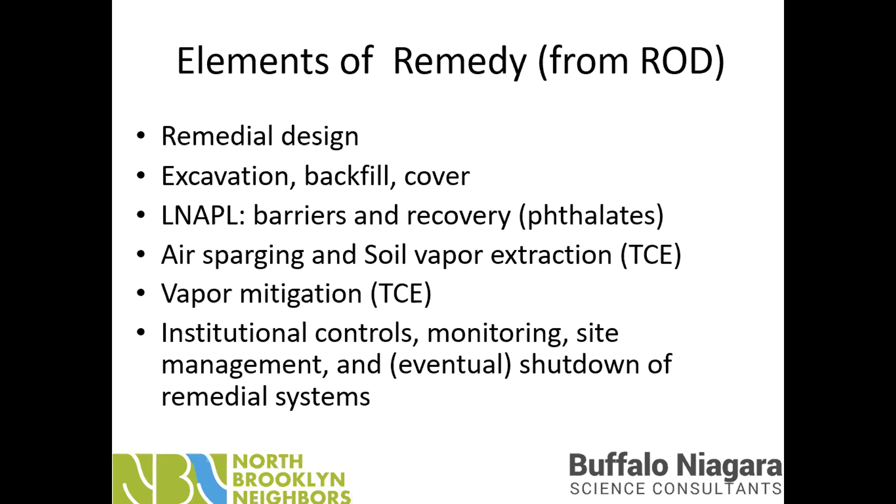And so I'll just end there, and we are willing to respond, like everybody else, to the questions and answers in terms of our roles and responsibilities in the TAG grant. And I'll stop sharing.

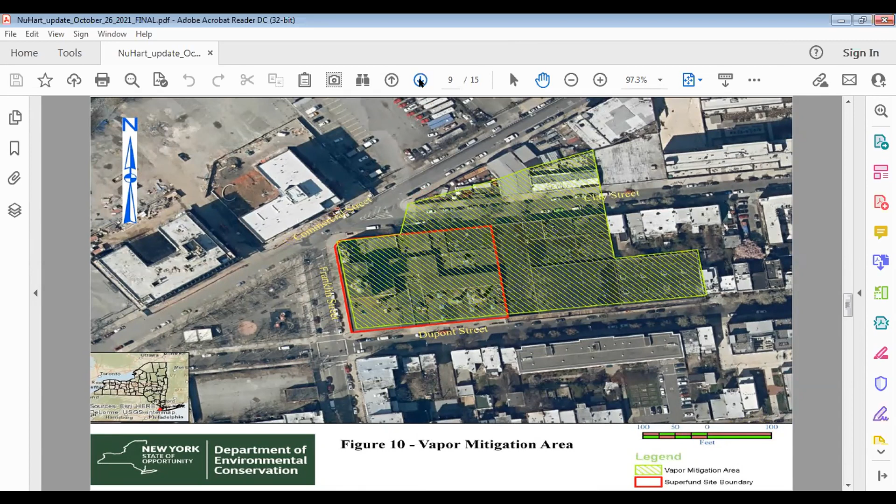And then this is a figure showing the area that is proposed for vapor mitigation. This was discussed during the ROD public meeting.

So with the current status of the Superfund portion of the site, again, there is an interim remedial measure, IRM, consisting of two phthalate recovery wells that are continuing to operate on the Superfund portion of the site. That is continuing, and we get monthly reports on that, on how much product is being recovered, et cetera.

They are also continuing to monitor all of the off-site wells to confirm that the phthalates are no longer migrating any further off-site. In addition, as I mentioned, the Superfund portion of the site was an active generator of hazardous waste. That means they fall under a federal program called the Resource Conservation and Recovery Act.

And the RCRA program essentially requires that any hazardous waste generation or storage areas have to be properly closed before the building can be demolished. They're going to have to do investigation of the building itself, inside the building. So right now we have this RCRA closure plan that was submitted by the prospective purchaser in September.

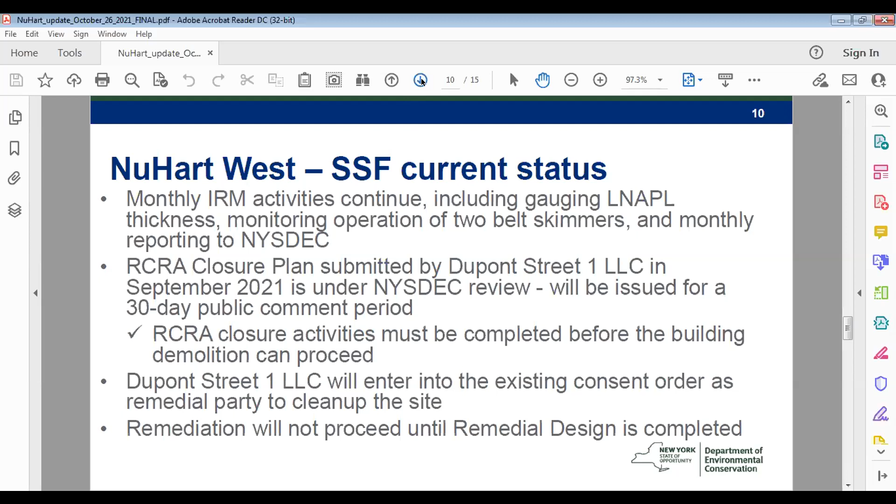And finally, the remediation on the Superfund site will not proceed until the remedial design is completed and vetted by DEC, DOH, and your TAG consultants.

So moving on to NuHart East, that's the portion of the site that the prospective purchaser is looking to bring through the brownfield cleanup program. They have submitted an application which included a supplemental investigation work plan and an interim remedial measures work plan. That application, those work plans were submitted in August 2021.

The purpose of the supplemental investigation work plan is to collect additional data to develop the remedial action work plan that's required for the eastern portion of the site. The IRM work plan proposes to remove 5 petroleum underground storage tanks, USTs, and the associated petroleum impacted soil. That's in the northeast corner of the BCP site.

In addition, these IRM excavations will allow installation of a minimal foundation element, which is required to allow the site to qualify for affordable housing credits.

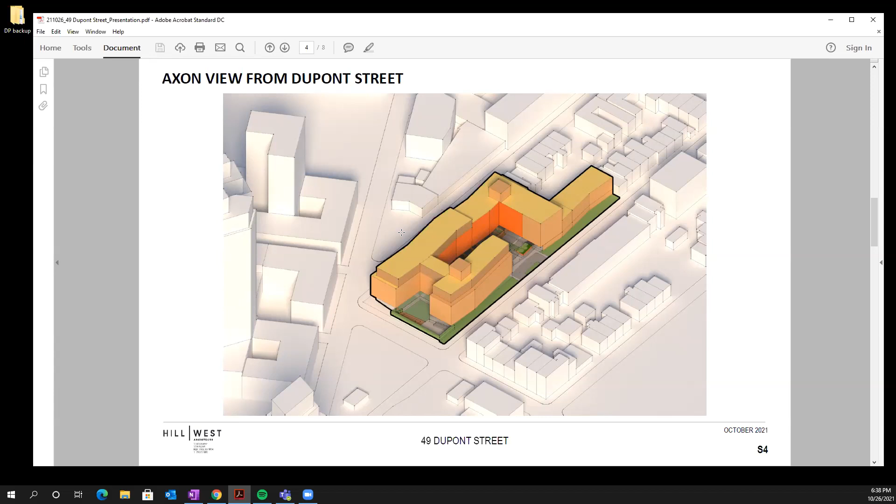But also we've retained the environmental consultant, James Bello at Haley Aldrich, for continuity. He's been with the site for a long period of time and has been extremely helpful in helping us wrap our hands around the existing conditions, the cleanup that's required, and ongoing dialogue with the various agencies, whether it be OER, DEC, and local electeds.

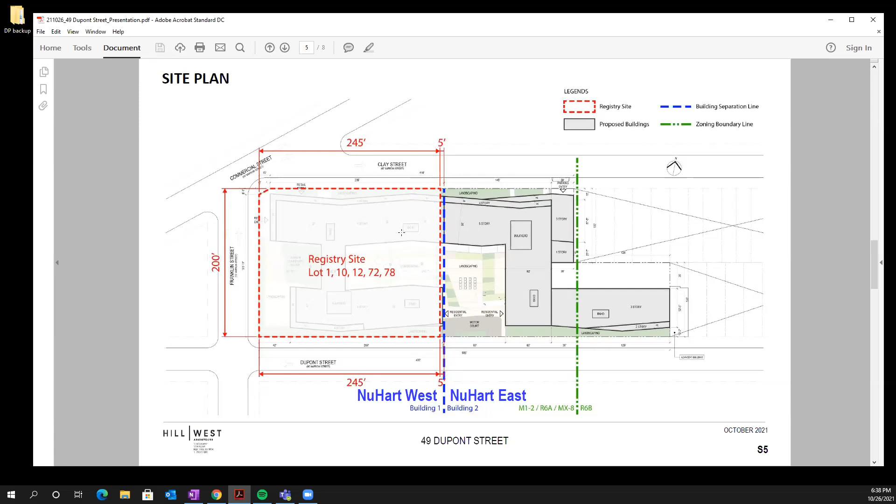Quick overview of remediation and development timeline.

As Jane mentioned, we did some geotech borings earlier this summer. Today, abatement is ongoing, started by the prior owner, and this is subject to the jurisdiction of DEP and DOL. We mobilized about a week and a half ago, but this week it's been slowed down due to rain.

We also understand that community members have seen people in and out of the building. The owner of the abatement company manages inflow and outflow of the building to make sure we don't have people walking off the street, because once those gates come up, there's a lot of interest from people to see what's inside.

We're also working in parallel right now against a tight deadline to further develop, with our design team, drawings, construction documents, and DOB approvals in parallel, for demolition, foundation, and ultimately the new building.

We've had conversations with the various agencies, DEC and OER, regarding the cleanup, brownfield, the remedial design, and what's required to ultimately allow us to redevelop the site and clean it up. Right now we're in the middle of the brownfield public comment period, which ends on November 12th. We anticipate in a couple weeks or by the end of the year the RCRA closure plan public comment period, and then sometime next year the remedial action work plan for the registry site.

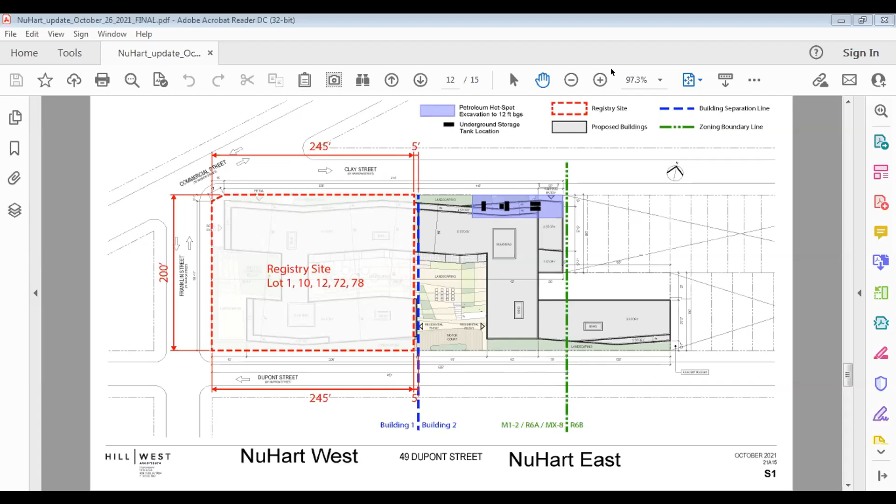Ben, you can go ahead. Thanks, if my video—there we go. This is for Jane. I guess also two questions about under the street. Just to clarify or expand on the first one, those wells have been active for several years, extracting material, correct? Is there any way to quantify how much has been extracted?

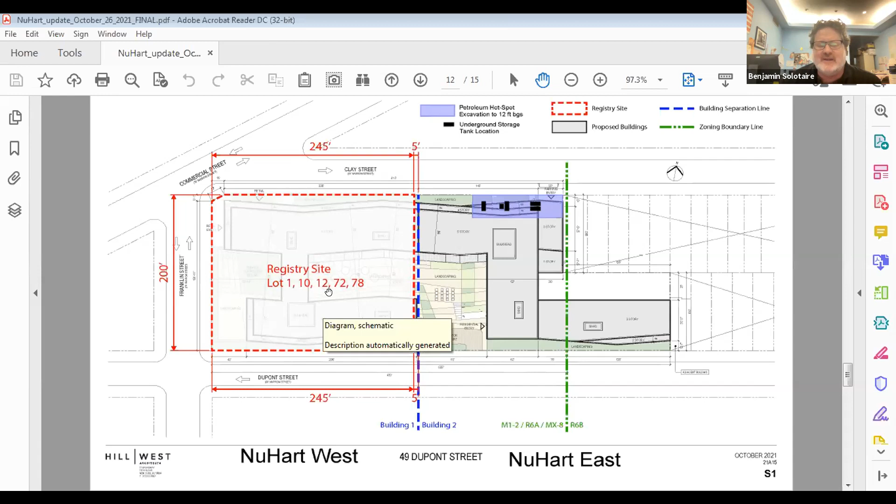That's a good question, Benjamin. So to answer the first part, the wells that are currently active and pumping are inside the building, in this area here. Off the top of my head, I don't know how much they've recovered over the years. I don't know if James Ballou, do you know how much has been recovered? Yeah, it's about 4,000 gallons.

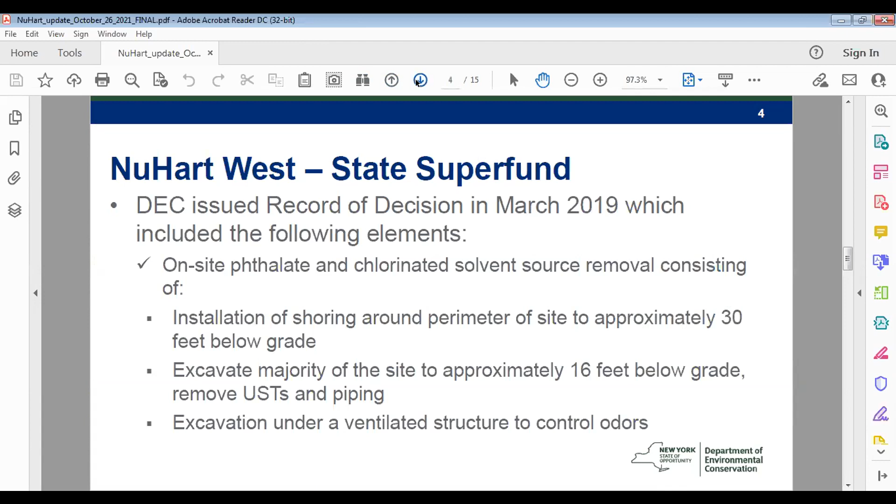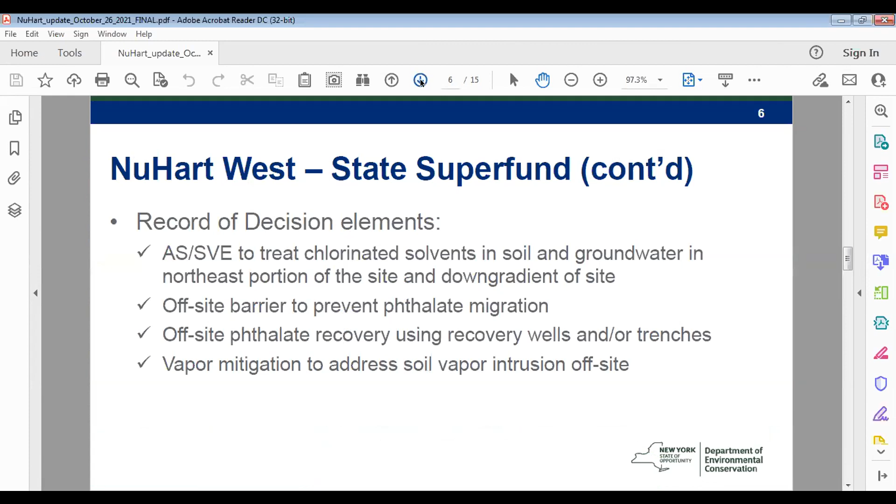So the figure that shows this blob is just showing in green areas where we might place recovery wells—again, this will be fleshed out in the remedial design. And the same with the TCE plume? The TCE plume is up here—that's a different animal. Let me see if I can find that one. Hold on. Okay, so the TCE plume is up in this corner of the site. Interestingly, the phthalates seem to have been migrating in this direction, whereas the TCE is flowing in the direction the groundwater is flowing—the groundwater is flowing up towards Newtown Creek.

The phthalates are flowing in this direction, and the reason for that, we believe, is because of the thickness of the amount of phthalates that were released on site, which sort of created its own hydraulic gradient, if you will. And that's why the phthalates are moving perpendicular to the direction of groundwater flow.

But in terms of the remedy for the chlorinated solvents, that would not be a pump and treat or recovery wells, because this is all just dissolved phase. So this would be treated through air sparging and soil vapor extraction, or an equivalent technology such as in situ chemical oxidation, after they excavate out the source of those chlorinated solvents, which is in this area here.

So I don't see that as a big concern, and that would be factored into the design of a new building. But hopefully the remediation will reduce the need for that. Then it becomes sort of a fallback.

So this is Scarlett. I can't share my video either right now. I'm with New York State Department of Health. I work with Jane at DEC, and my team, Steve Lawrence, is the project manager recently assigned to this site, and Angela Martin, who's also on here, who is his supervisor.

We're going to review all aspects of the remedial design, including any subslab depressurization systems and verification of its effectiveness, if one is installed on the main building on NuHart West.

And to speak a little bit more to... I wasn't entirely sure I understood the question as far as the air, what would be in place for the air, for the structure. Were you talking about the new building to be built on the site, or were you talking about under the enclosure for while excavation was going on?

Can you provide a little clarification, whoever asked that question? Because for the structure itself, typically, if it's done under a tent, there's some sort of air filtration, carbon filtration that would be part of the design that we would review along with DEC before anything was implemented.

But at any rate, anything that's going to be done on the site as far as intrusive activities or development, there definitely has to be a robust community air monitoring plan in place that includes monitoring with very conservative levels at the downgradient, downwind, as well as upwind areas. And if any of those very conservative levels are reached, actions are taken to address those concerns well before there's any sort of health concern for those values.

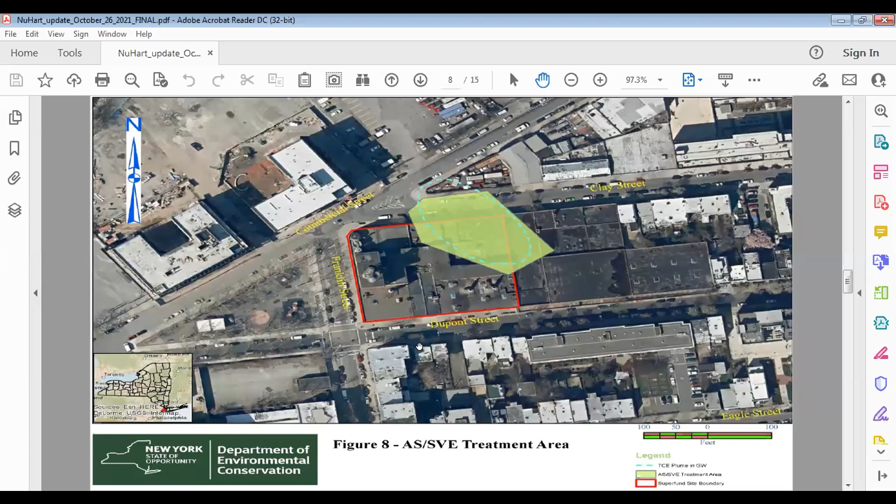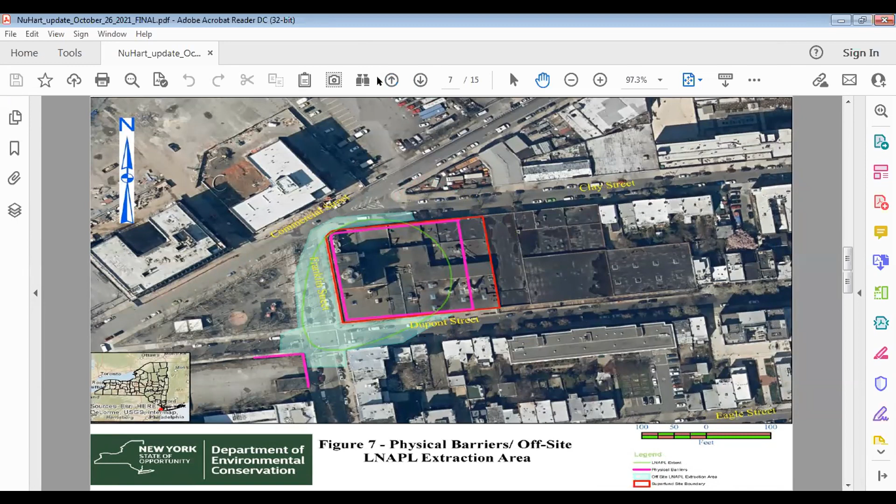Unmute, Jane. Let me see if I can share my screen - DuPont Street, here. Everything you pointed to was on Franklin and Clay Street, but nothing on DuPont Street. Oh wait, I think it's the other one, let me give it one second. All right, so we have monitoring wells here, along DuPont Street. Let me get to the other figure, it's a little easier to see - this yellow line.

So we have monitoring wells all outside of that line. Okay, so then we don't have to worry about it going east slightly and south. No, we've been monitoring this plume for 10 years now across the street, and it has not moved from what you're seeing on this screen right now.

Great, okay. And then the other part of my question was for Zach, or whoever wants to answer this. Going back to the picture, is it possible - right across from the word DuPont on DuPont Street, there is a lot that was a parking lot. Is that still part of the property?

No, that is not part of the Superfund site. Okay, not really for your thing, but is it part of the property? Zach, maybe you can tell me that. To my knowledge, it's not part of the current collateral or part of the site. Okay, then I don't need to ask you whether you would clean it up. Thank you.

Alan and Joe, would you like to chime in to confirm what Jane said about the wells on DuPont, the monitoring? Well, this is Alan, the groundwater guy with the technical advisory group, and I would just confirm what Jane said, that that's been well monitored and it doesn't seem to be moving.

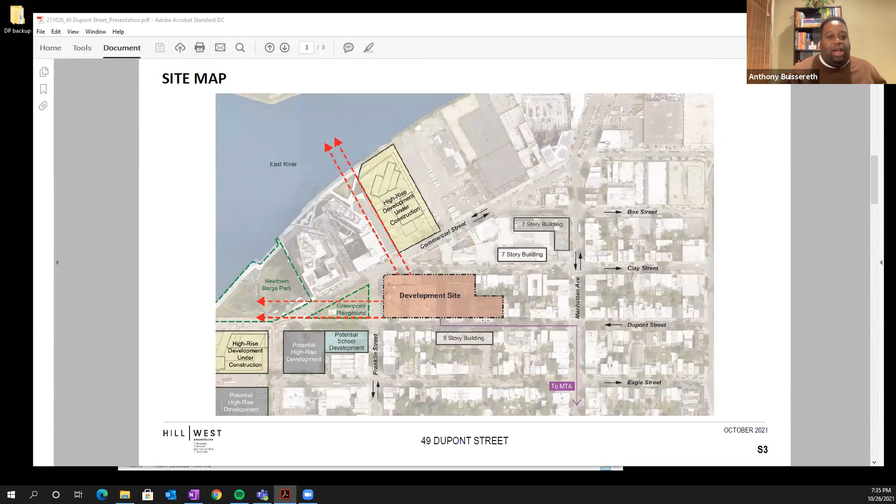We've also, I think some of, yeah, we can see your screen. So yeah, do you want to point back out? Go back one slide, I think. Yeah, that one. No, back up one. I see slide 2. I think this is slide 3.

I think slide 3, the site map, clearly shows how close the site is, not only to the water, but also to other open spaces in the neighborhood and publicly shared spaces, in addition to the private residential spaces as well. Nicole, do you want to just point out a couple of spots so folks can be clear?

Yeah, I have the habit of always moving my arrow. Obviously I don't have control of the screen. But you can see here at the middle left of the image is the Newtown Barge Park, which is a public park on the waterfront. Just to the right of that is the Greenpoint Playground. Just south of that is the potential school development zone that's part of Greenpoint Landing.

And that's also another question that has come up, as to where the siting of that school is and what's the status of that. And then there'll be a new MTA park, I believe, where that current parking lot is being shown - is that the right site? So there's several open spaces as well as a public school space directly adjacent to the development site, in addition to all the private residential and of course the shared right of way.

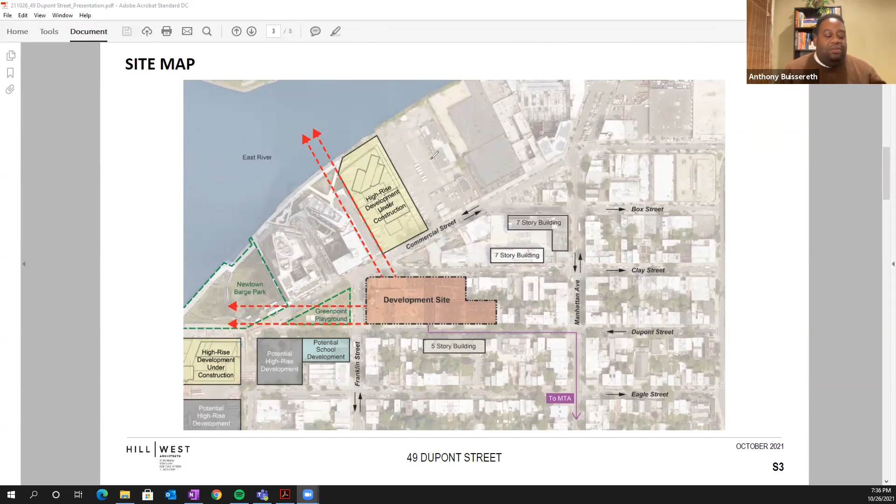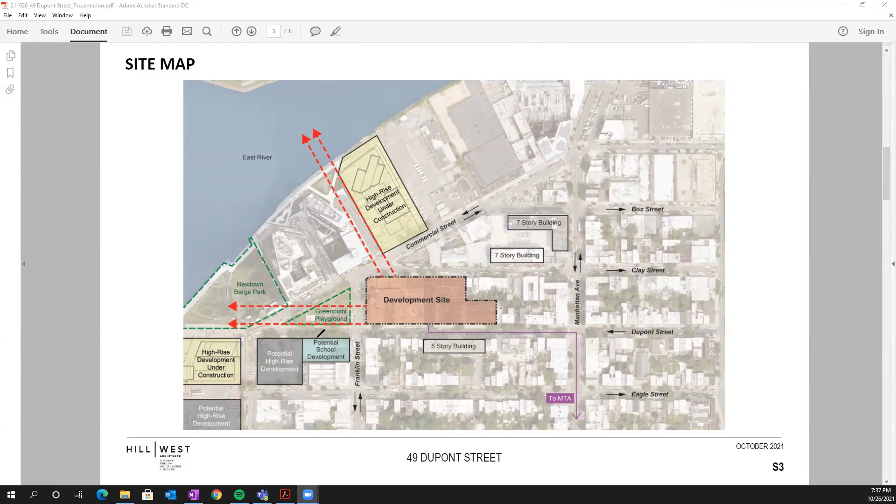This is the potential school development site, we've been working on this for a couple of years. The council member is aware of the concerns and feels the concerns of the community, is in agreement with those, that it is not a good place to put a school. It is too close. The phthalates are particularly affecting younger kids in their development. It's an endocrine disruptor. He said several years ago that he would not allow the school to be built there, would not approve that.

We've looked, the problem is where else does it go? We've looked throughout the community for sites. We have had deep conversations with two sites, neither of which came to fruition. This administration, which will be gone soon, feels they have a free site essentially. One of the sites we would get in trade-off of additional floor area, that was the Red Sky site at Java Street. They ended up selling the building, and the new developers, though very working with the community and being very responsive, did not have an interest in putting a school there.

And then we looked at another site that was interested in it, but wanted financial compensation. So the city, I suppose, said, for $50 million, why would we spend $50 million or more on a site when we have a site for free? We've had several conversations with the DOE and SCA, not in the last year, but at the moment it is a stalled process in relocating it, and we will continue to look at it for the last few months of our term here.